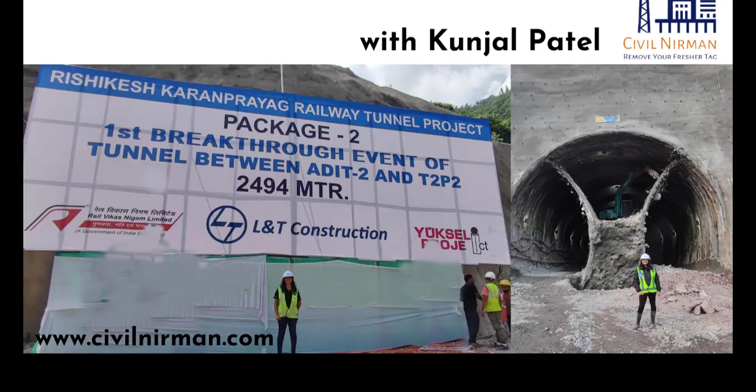In today's generation, engineers face a lot of difficulties regarding their career path choices, especially in civil engineering, because we have a wide range of fields like transportation, geotechnical, and construction management. After graduation, students get confused about which field to choose based on their interests, to lead to a good career profile. Those who score high get placements and well-paid jobs, but what about the average students who are unable to get placements? They're confused about how to improve their skills to get a well-paid job.

So in order to overcome all these confusions, we are starting an initiative where we will bring experts and engineers from various categories of the field, and share their journey with you all, so you get some idea about different categories of fields and can share your confusion with us so we can try to resolve it. So, starting and beginning with our first ever podcast with Kunjal Patel.

She is a graduate engineer and a gold medalist during her career. She has also made her way to one of the biggest tunnel projects going on in India. We will share her journey, how she led to such a huge position after her career journey. So I welcome Kunjal to the podcast on Civil Nirman.

So yeah, students, let's begin with the presentation. It's a discussion on the Rishikesh-Karanprayag railway line. I'll start with some basic salient features of this project. The purpose of this project is to facilitate easy access to the Char Dham shrines of Yamunotri, Gangotri, Badrinath and Kedarnath, the Char Dham in the state of Uttarakhand.

It will help pilgrims to reach there, and it will also connect the new trade center, and develop the backward area of the Uttarakhand state, and serve the population living in the area. It's said that it will create jobs for 2,000 plus local people of Uttarakhand state, and it will reduce travel time from Rishikesh to Karnaprayag from 7 hours to just 2 hours, because there is no connectivity from Rishikesh to Karnaprayag other than road transportation. There is no air mode of transportation or water or anything, and there was no railway line earlier either from Rishikesh.

Rishikesh is the last point till now of India's railway network. This area faces a lot of landslides and floods, so people and tourists visiting Chardham face a lot of issues, and their journey gets interrupted by these natural calamities.

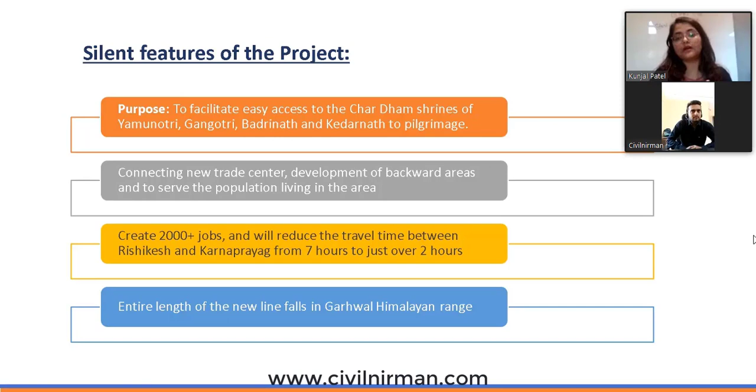So, to make transportation safer and to increase tourism in India, it's the dream project of Narendra Modi. The Indian government has made this an initiative and allotted a lot of budget to this project. This entire length of the line falls in the Garhwal Himalayan range of Uttarakhand.

The interesting part is that out of the total 125 kilometers, from Rishikesh to Karnaprayag, 105.47 kilometers - that's more than 84% of the total stretch - will be underground, entirely through tunnels only.

Out of these 105 kilometers, 55 kilometers of tunnel has already been excavated by many companies - 10 contracting companies are working right now. There's one tunnel of 15.1 kilometers, one of the longest tunnels in the country, which will be constructed from Devprayag to Lachmoli.

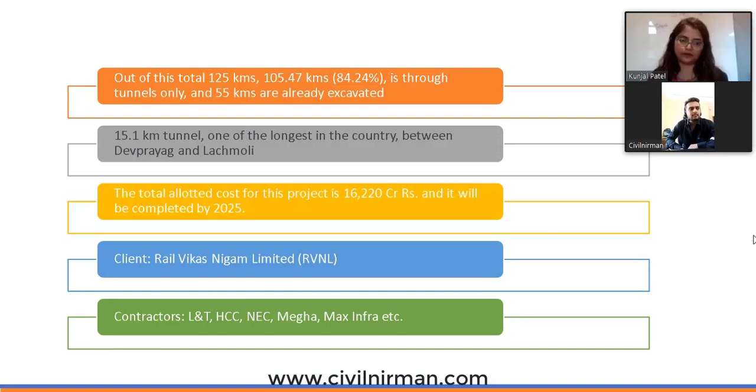The total allocated cost for this project is 16,220 crores, and the expected completion date is 2025. The client is Rail Vikas Nigam Limited (RVNL), and there are many contractors including L&T, Hindustan Construction Company, NEC, Megha, Max Infra, etc.

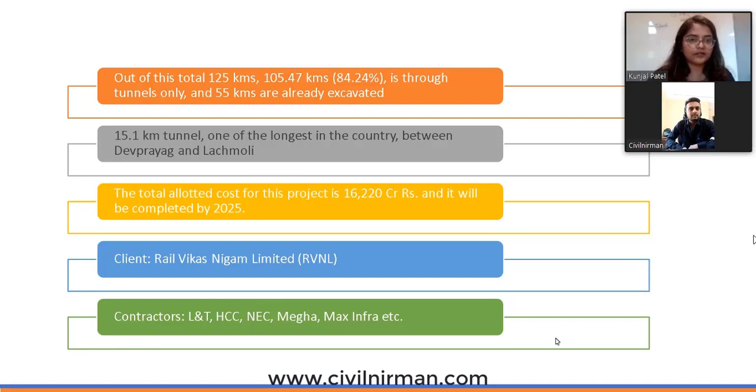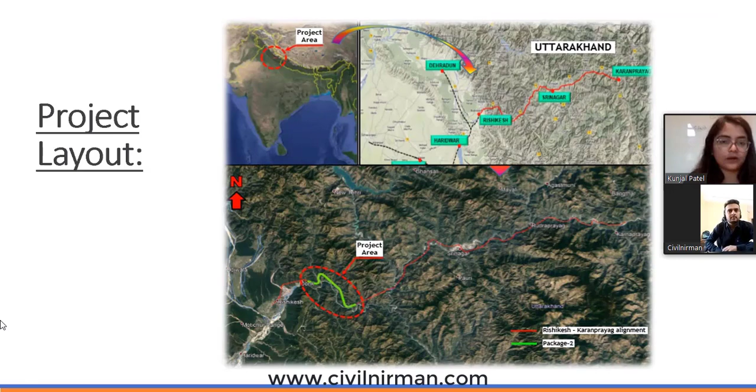Now see the project layout. It's located in the northern part of Uttarakhand state, starting from Rishikesh, going to Srinagar, and the last point is Karnaprayag. Let's go through the exact layout - you can see it clearly. The major stations are Rishikesh, Devprayag, Srinagar, Rudraprayag, and finally Karanprayag.

The distance by road from Rishikesh to Karnaprayag is 172 kilometers. By constructing this tunnel, the distance will be reduced from 172 to 125 kilometers, and travel time will also be reduced from 7 hours to just 2 hours.

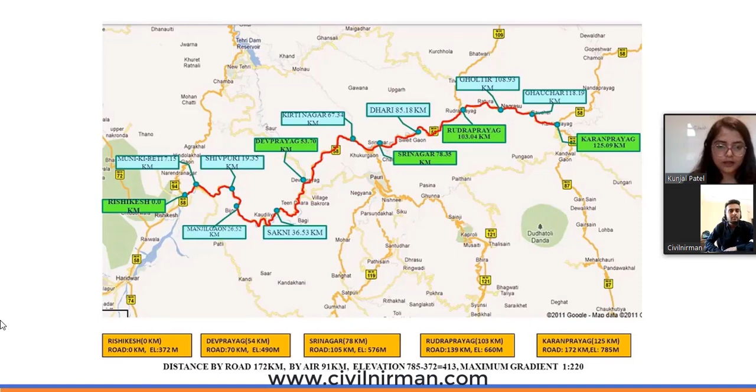This is a very huge project, and one company alone is not able to complete it. It's a very time-bound project, and the government wants to complete it in a very small duration. So this entire project has been divided into 10 packages, with 10 civil contractors working on different stretches of the entire length.

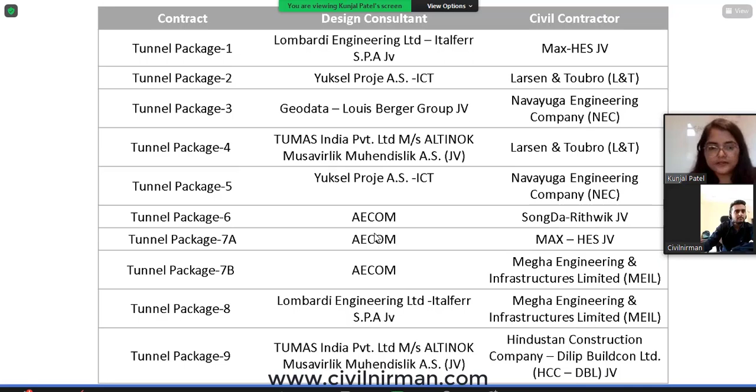As for civil contractors, there's Max-HES JV, and L&T is constructing two packages - package 2 and package 4. Navayuga is also constructing package 3 and package 5. The last one, package 9, at the end part of this project on the Karanprayag side, is being constructed by Hindustan Construction Company (HCC) and Dilip Buildcon DBL, a joint venture of these two companies.

So this is the New Austrian Tunneling Method, NATM. There are basically two types of tunneling - TBM, the conventional part where we excavate the tunnel using a tunnel boring machine, and the other is the New Austrian Tunneling Method, which is very new to India and currently being adopted in only 3 to 4 tunneling projects in India, I guess.

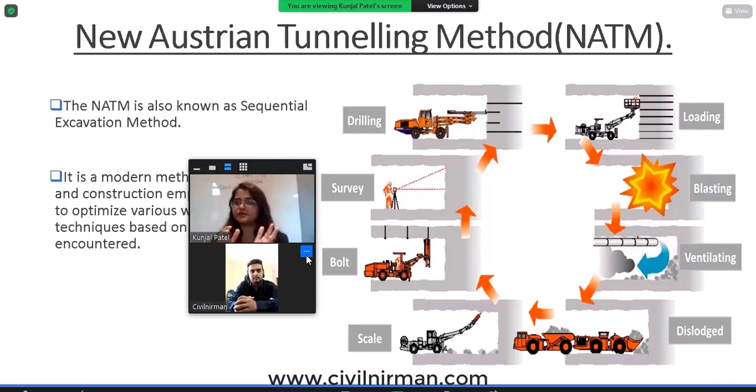So the question would arise - why are we not using TBM, and why are we going with this new tunneling technology? In the Himalayan region, the rock class is very high. If you use a TBM of huge diameter, the cost is very high since we are importing this equipment from Germany and entirely from abroad. It's very costly, and there are chances that parts of this machine get stuck in the hard rock. So based on the rock type, we decided to go for NATM, the New Austrian Tunneling Method.

It's also known as the sequential excavation method, and it's a modern method of tunnel design, construction, and monitoring to optimize various wall reinforcement techniques based on the type of rock encountered, as I said.

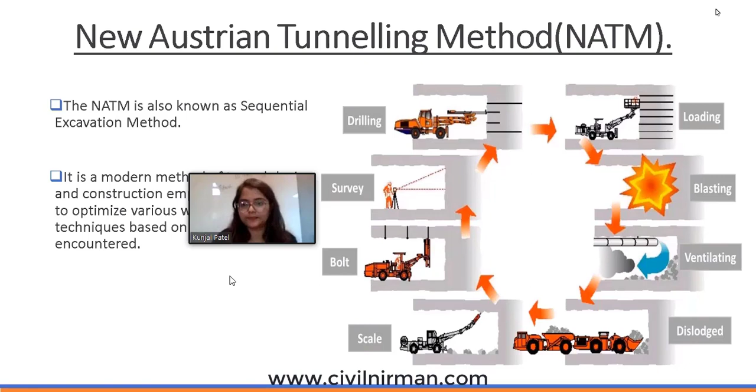Now if you see the work methodology, we start with survey. The survey team will come to the site and mark the profile using the latest survey equipment, and we'll set the alignment. Based on that, we'll decide the drilling pattern, like where we have to drill and excavate the tunnel.

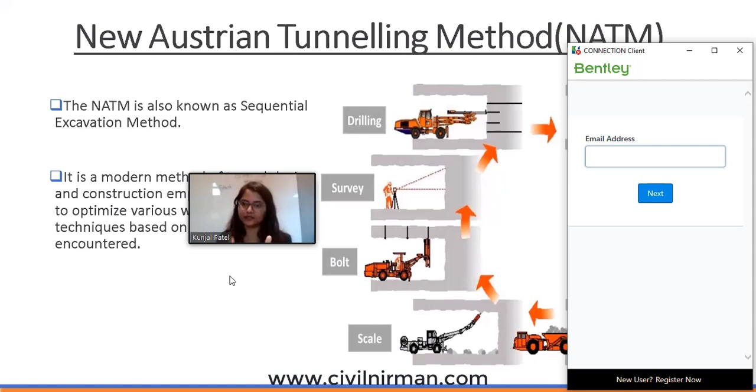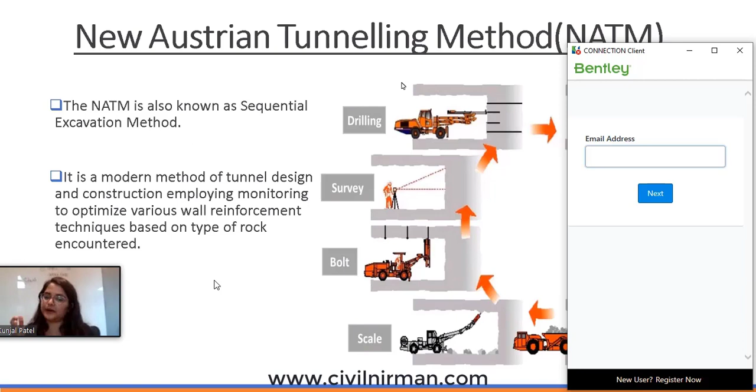We are using automatic as well as semi-automatic drilling jumbos for excavating the tunnel. Then the next part is loading the explosives through the drill holes. We use explosive materials for this loading purpose, and then the entire tunnel will be evacuated and the blast will be taken inside the tunnel through these explosives. Then the fume gases and small particles of soil or rock in the air will be evacuated through the ventilation shaft, and the excavated material, that is muck, will be dislodged through dumpers outside the tunnel.

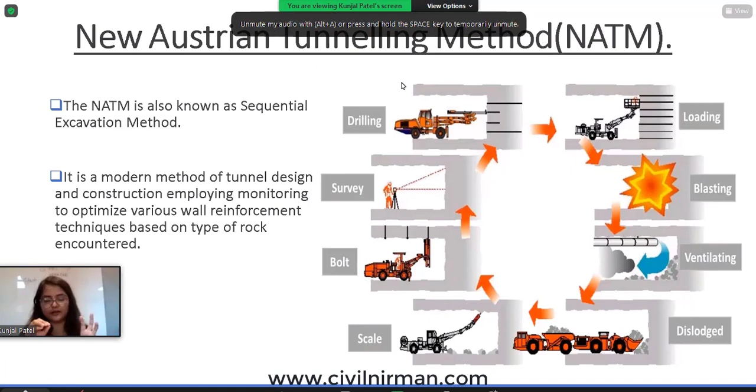Then the profile will be exactly scaled - small parts with overbreak or undercuts will be removed during scaling to make the profile more accurate. And then at the last, we apply some supporting parts like girders or shotcreting work, which is done only after that.

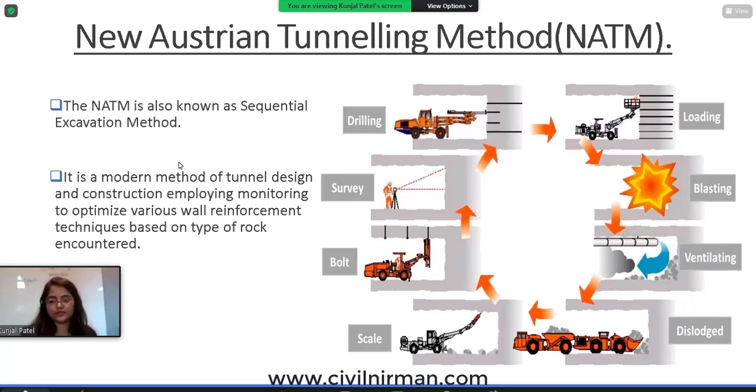So this was about the tunneling technology. Now let's go to the work methodology part.

There are two parallel tunnels, the escape tunnel and the main tunnel, running from Rishikesh to Karnaprayag. The main tunnel is for the broad gauge railway line, and the escape tunnel is specifically for emergency purposes or some defense purpose.

The diameter of this main tunnel is very large, and we can't excavate it in entire full face. There's a possibility of the soil strata falling and collapsing due to geological fractures, because there will be a lot of load pressure coming on the top crown of the tunnel due to the huge mountain above.

So we are doing the excavation stage-wise. The first is the top heading portion, and the bottom one is called benching. In most of the scope, we are doing this in two stages.

Then if we have two or three lines, in some portions where the station is being constructed, there will be three parallel lines of the railway tunnel. There the diameter will also be a bit more than the main tunnel, so we excavate the tunnel in 4 or 7 stages.

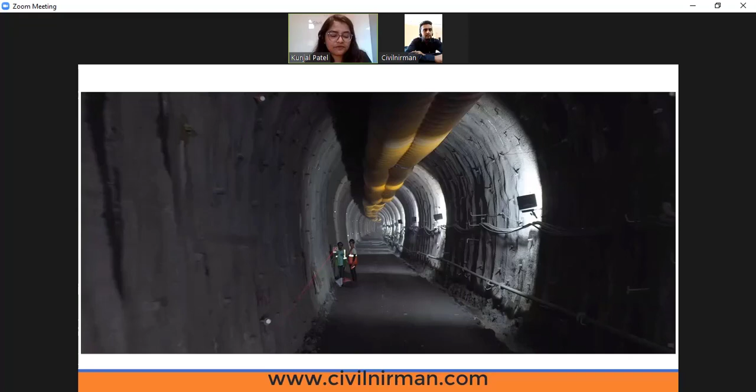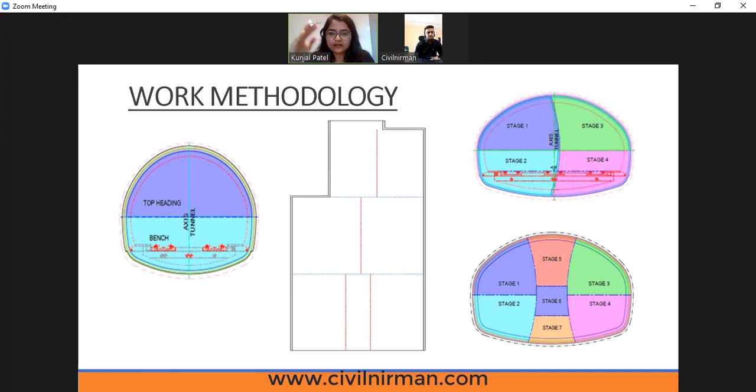So these are some photographs so that you can visualize this project that I was talking about. That's it from my side. I hope this presentation will definitely help everyone understand how challenging this project is, and gives everyone some idea about the project and the challenges engineers are facing at this particular tunnel project.

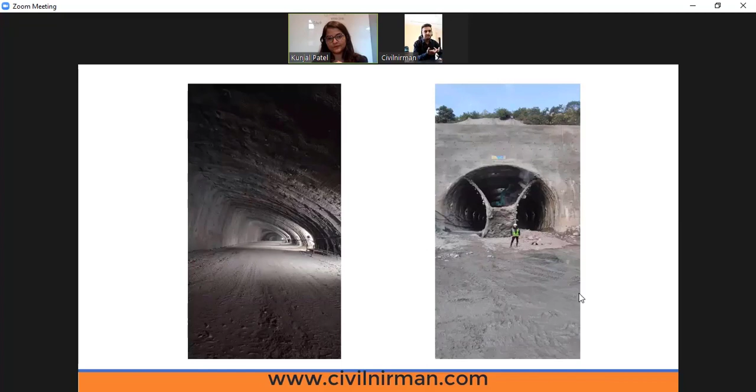Now Kunjal, one more thing I want to ask: as you've shown the situation at the tunnel, how the excavation and other procedures are carried out, I'm concerned about the workers and engineers working in such a hazardous situation. Do you feel the atmospheric condition is okay? I'd like to ask about the health aspects - what precautions are you all taking at this location while working or visiting the site during execution, and what safety precautions does the company take for everyone's health? Don't you feel breathing issues there, since it's such a congested location where people have to walk?

To make the working environment comfortable and safer, we provide this ventilation shaft that I showed - you can see this yellow portion, the yellow shaft. The air pump is outside the tunnel, and through continuous suction it sucks out the particles and fuming gas, making the air clearer. At the time of blasting, the entire tunnel is evacuated - all laborers and equipment are sent outside the tunnel, and only then is the blast taken. After about 10-15 minutes, once the dust and excavated strata settle, the laborers are allowed back inside. We also continuously conduct air quality tests, water sampling tests, and noise level tests - these three environmental measures are conducted every 15 days for each phase, and based on the parameters, corrective measurements are taken.